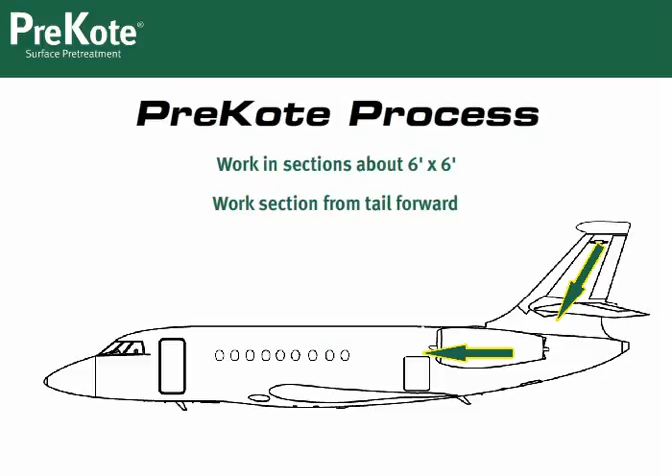Now that you have the tools, let's review the PreKote process. The way you process the aircraft will obviously depend on the crew size, but here are some general guidelines. Work in sections about 6 feet by 6 feet. Work each section moving from the tail forward. Note that you will apply PreKote twice, first scrubbing in one direction and then the other. This ensures that all areas have been thoroughly processed.

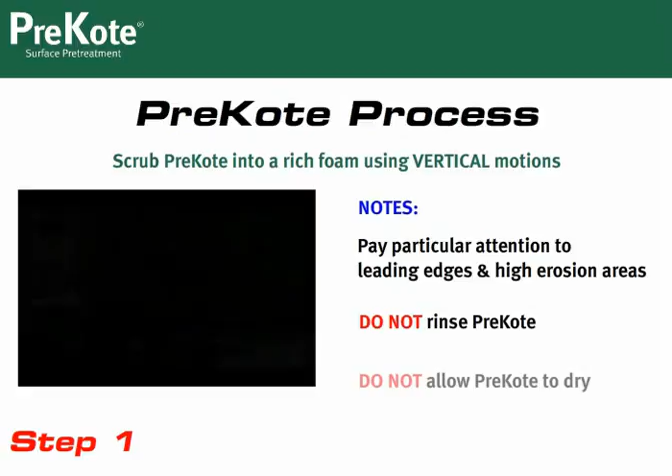Alright, step 1. Spray PreKote in the 6 foot by 6 foot section. Using the pole scrubbers with the Scotch-Brite, scrub the PreKote into a rich lather using vertical or up and down motion. Be sure to overlap strokes so that you cover the entire area. Pay close attention to leading edges and high erosion areas. Do not rinse the PreKote or allow the PreKote foam to dry. If it does, simply reapply the PreKote and scrub again.

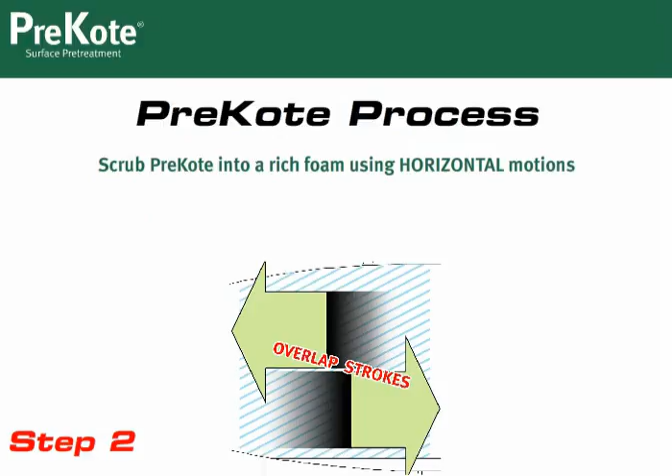Next, spray another coat of PreKote over the foamed area you just scrubbed. This time, scrub the PreKote in a horizontal or left to right motion. Again, be sure to overlap the strokes and pay close attention to leading edges and high erosion areas.

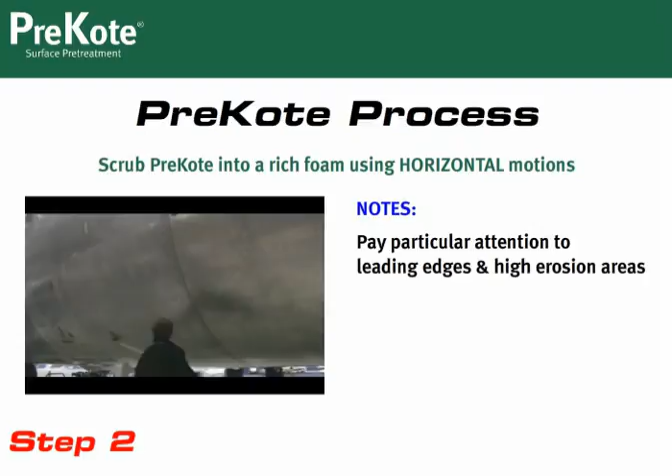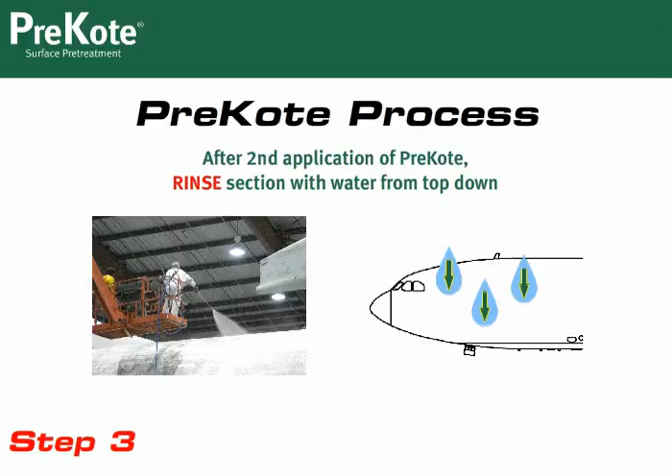Now that you've applied and scrubbed twice, you're ready to rinse the section. Always rinse from the top down. Now, move to the next 6 by 6 section and continue this process for each section. When all sections have been processed, remove all the masking. Inspect the aircraft and rinse any areas where PreKote foam remains, ensuring the entire aircraft is clean.

Once the aircraft is dry, you are ready to prime. Be sure to prime within 24 hours though. This is to ensure that the skin does not become contaminated with materials such as dust.

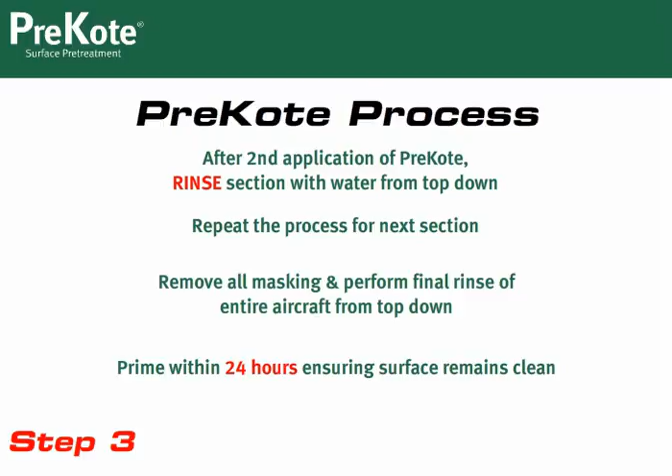There are some things to keep in mind. The type of abrasive pad is important. Please use only the recommended type. Do not allow PreKote to dry during either application. Do not rinse the PreKote between applications. Remember, you apply and scrub twice before rinsing the section.

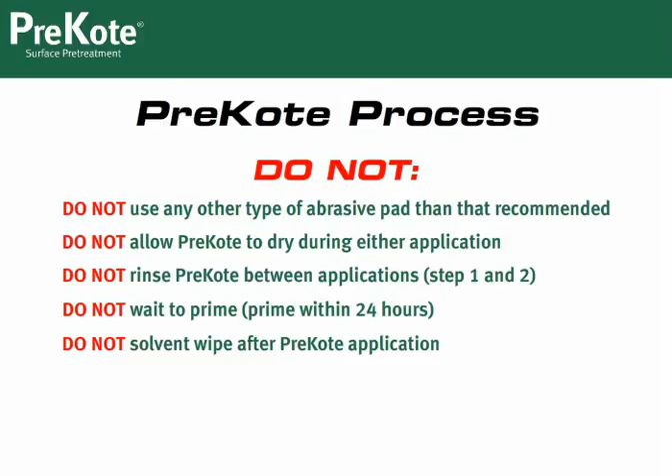Do not wait to prime the aircraft. You don't want the aircraft to become contaminated prior to priming. Lastly, do not solvent wipe the aircraft after the PreKote applications. If, for any reason, by accident, these things do occur, simply start over.